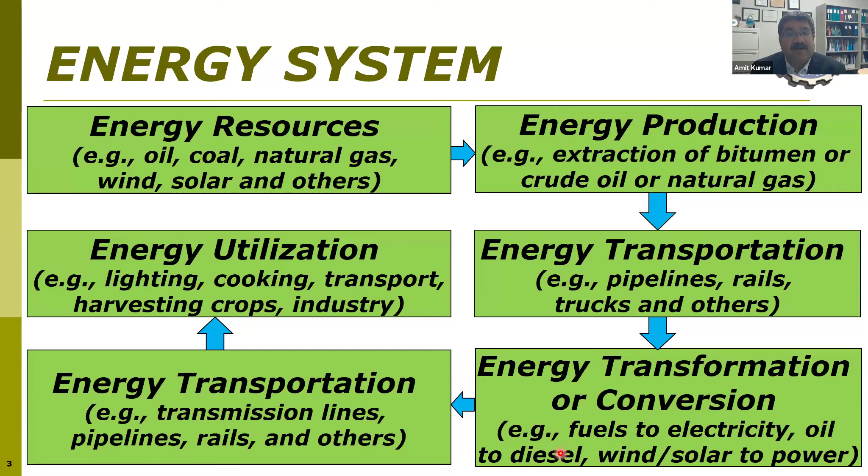If you look at the energy system, all the activities you do, starting all the way from production to utilization, are associated with impacts - greenhouse gas impact, a lot of focus on that, water impacts, land use impacts, and others, including, for example, biodiversity impact.

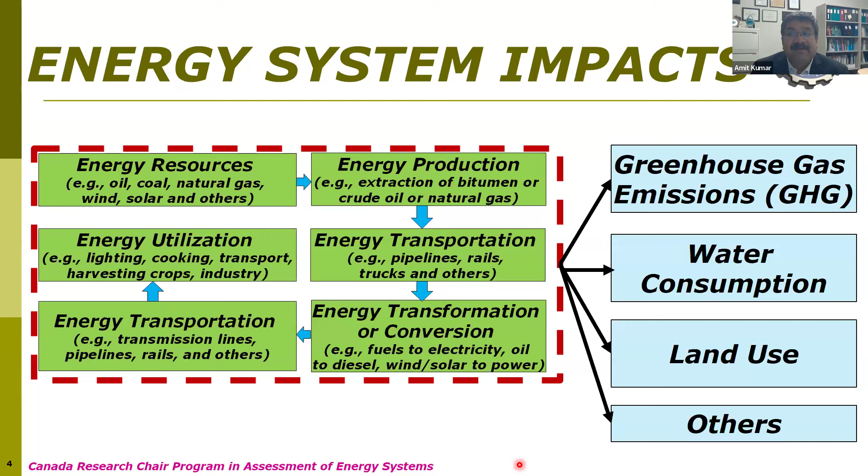Now, if you look at energy system change or energy system transition, what does this mean? It means basically moving from one type to another. So if we think about production, we look at fossil fuel-based energy being replaced by renewables or low carbon intensity energy - for example, coal by natural gas. So, from one energy source to another. On the consumption side, fossil fuel-based furnaces, for example natural gas furnaces, being replaced by electricity-based furnaces - again, a change from one source to another. In the transportation sector, electric vehicles are basically coming in and replacing some gasoline vehicles - again, change from one source to another. So that's the energy system change.

But this change is continuous. It's a journey rather than a destination. Energy transition has been happening since the beginning of civilization. We transitioned from non-commercial energy to commercial energy. For some parts of the world, it's the transition from one fossil fuel to another, much cleaner fossil fuel to renewable fuel. In some jurisdictions, it's even just going from no energy to energy. In 2022, there were 600 million people in the world who did not have access to electricity. So getting electricity is a transition from no energy source to an electricity source. It's a journey rather than a destination - that's the key message here.

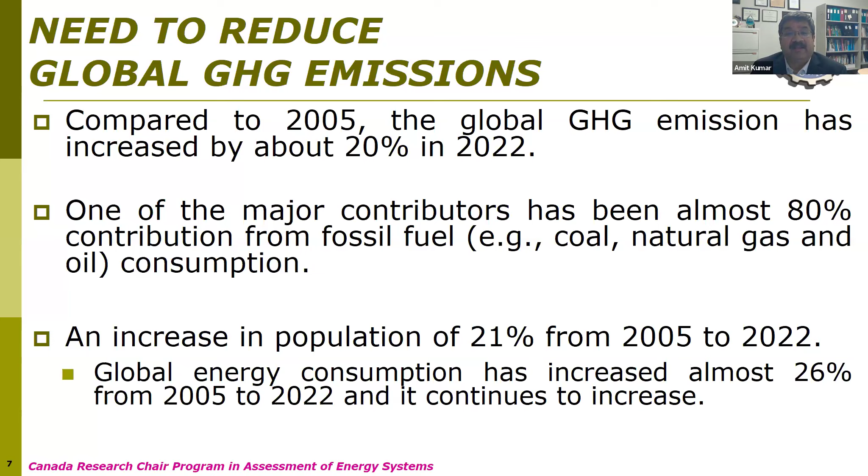We still use a significant portion of our energy from fossil fuels. If you look at the way we're going, our global energy consumption is increasing. Today we have about 8 billion people, and we expect by 2050 there will be somewhere between 9.8 and 10 billion people who will need energy, and on a larger scale. A lot of this will still be supported by fossil fuel sources, which will lead to GHG emissions. So the need to mitigate this drives a lot of these changes.

Energy independence is focused on the fact that energy is not available globally everywhere we use it - it's concentrated in certain jurisdictions. For example, fossil fuel is produced by only 21 countries out of more than 190 countries globally. It needs to be transported from one place to another, and there are challenges in terms of geopolitical issues whenever there is disruption in the supply chain.

If you look at some of these fossil fuel production places, 75% of coal is produced by only 4 countries in the world. Crude oil - only 6 countries provide 60% of that. Natural gas - only 6 countries provide almost 60% of global natural gas consumption. So there is transportation, and these are impacted a lot by geopolitical issues, which is why there's a focus on producing what we have within our own jurisdiction, where we have control.

Getting to energy independence is a drive for change from one energy source to another. This involves availability of renewable sources, what sources are available, and low carbon intensity fossil fuels which are available. For coastal countries, resources like wave and tidal power become potential sources when cost effective. In most cases, the drive is to get energy at lower cost, so we'll focus a lot on GHG mitigation and decarbonization pathways.

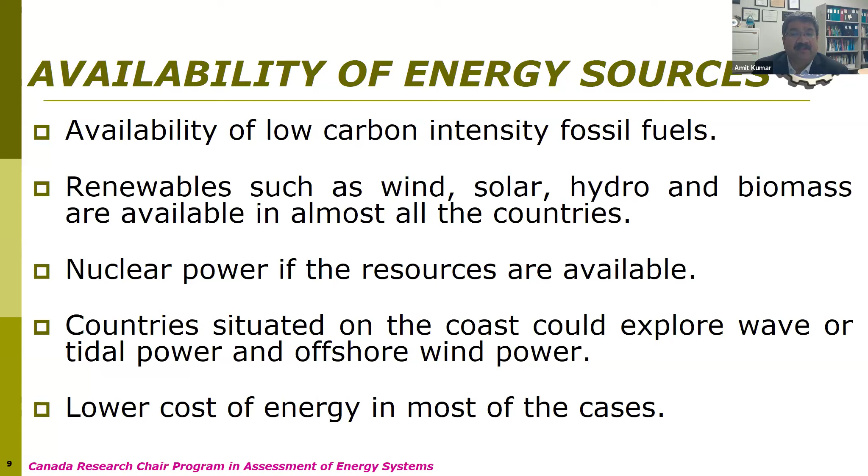In terms of GHG mitigation, when I think about the pathways for decarbonization and ways to mitigate greenhouse gases, I typically categorize all these options into three key baskets. The first basket is energy efficiency, where you improve the way you use energy. The second option is using more renewables like solar, wind, biomass, geothermal, in place of fossil fuels. The third piece is more focused on capturing what we emit.

For example, we use natural gas for producing power. You capture that CO2 which is emitted and put it underground or under the sea, sequestering that CO2. I also put hydrogen here, as there's a lot of interest in hydrogen. It could be placed into both baskets because you can produce it from renewable sources like wind and solar electricity, and use that in an electrolyzer to produce hydrogen and oxygen with water as a feedstock. We also produce a lot of hydrogen from natural gas today, but adding carbon capture and storage to this produces blue hydrogen, or low carbon intensity hydrogen. We'll come back to this.

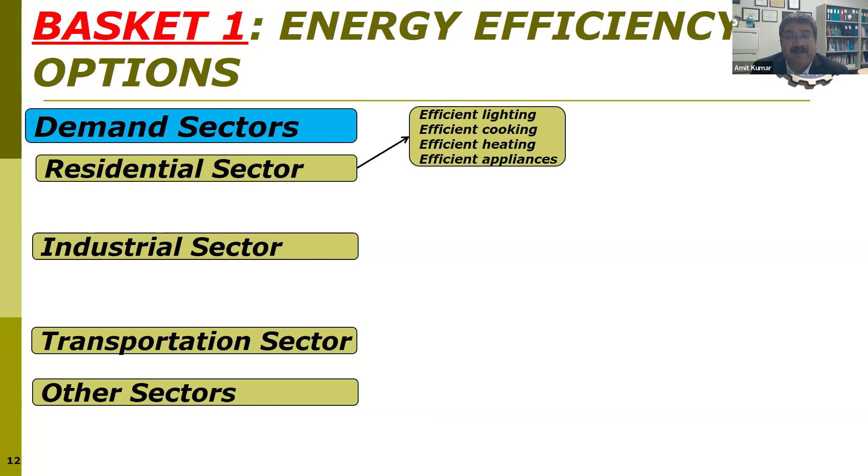If we look deeper into energy efficiency options, we have demand sectors - these sectors which consume energy. Our households, offices, industries all consume energy, and there are lots of options for improving energy efficiency. Under this basket, for the residential sector, there's efficient lighting, cooking, heating, appliances, and so on. For the industrial sector, this is just a snapshot of some key industries, but improving the efficiency of the equipment and the way we use energy reduces the amount needed, and thereby GHG mitigation.

The transportation sector, both freight and passenger, focuses in freight on efficient trucks, efficient trains or pipelines. Passenger transport focuses more on efficient cars. And then other sectors similarly focus on improving efficiency.

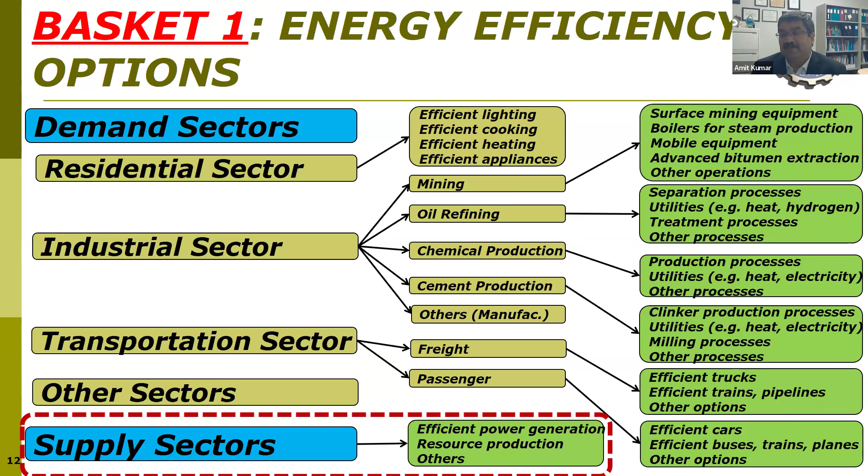That's the demand sector, but we also have energy efficiency options for the supply sector - efficient power generation from boilers, efficient turbines. These also provide lots of options. Most energy efficiency options are the low-hanging fruit - basically lower cost, so you can adopt these at lower cost per unit of CO2 mitigation. This is the first basket of options, and there are thousands of options to mitigate and use this.

The second one is renewable energy implementation, and I categorize these into two baskets. One is intermittent, which is not always available - wind, whenever it blows, we can generate power; whenever there is sun, we can generate solar energy; same for tidal, but these are intermittent. The other basket is base load renewables - hydropower, biomass energy, geothermal - these you can use all the time, these plants can run all the time, and these are base load renewables.

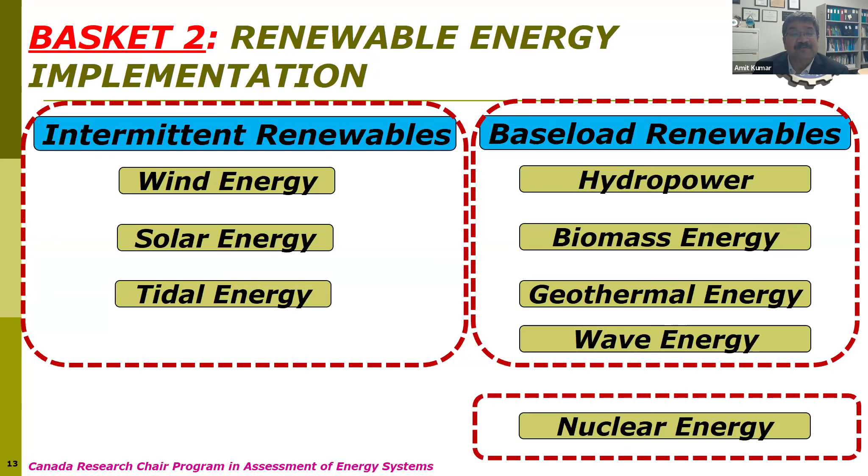I also put nuclear energy here, because there is a lot of interest in using nuclear energy as a decarbonization pathway, since you don't have GHG emissions when you use it. We have been using nuclear energy on a large scale, but there is a lot of talk now about small modular nuclear reactors - these are one-third the capacity of larger plants, about 300 megawatts. To give perspective, our West Edmonton Mall here uses 25 megawatts of electricity, so you can see how decentralized these small modular nuclear reactors are.

These are also smaller in size and footprint, but you can build the components and ship them, making them easier to assemble, which helps reduce construction cost. These modular reactors also have benefits in terms of how frequently you need to refuel them.

So typically, in a large nuclear power plant, you will refuel it in 1 to 2 years. These you can go to 3 to 7 years, and there is effort in looking at refueling this every 30 years. So you could see the impact of these. This technology is still developing, but this also is a key option for decarbonization.

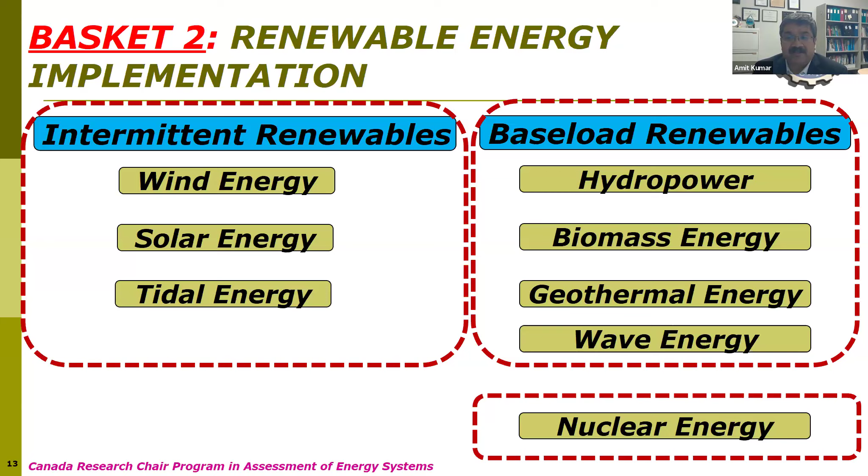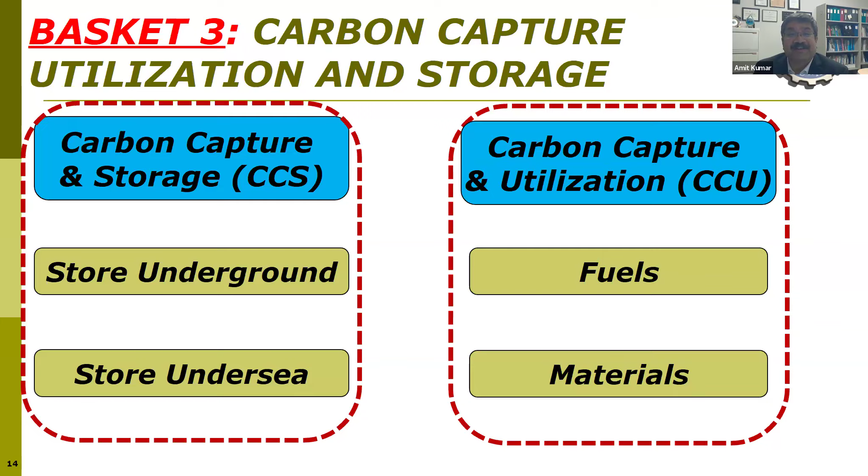We use a lot of hydrogen today, here and globally, but this is produced from natural gas. We produce hydrogen from natural gas, and in the process, there is emission of CO2. But currently, most of this CO2 goes into the atmosphere. And the process that we use is steam methane reforming. That's what we use for producing hydrogen. But this is gray hydrogen.

Another key basket is producing green hydrogen, which is from renewable sources. So we produce electricity from these renewable sources, use it in an electrolyzer, and produce hydrogen and oxygen with water as a feedstock. Most of these, almost all the renewables, can produce electricity and then produce hydrogen through an electrolyzer. Biomass could be used directly to produce hydrogen through gasification and pyrolysis. And here biomass I'm referring to, for example, waste residues, straw, forest residues.

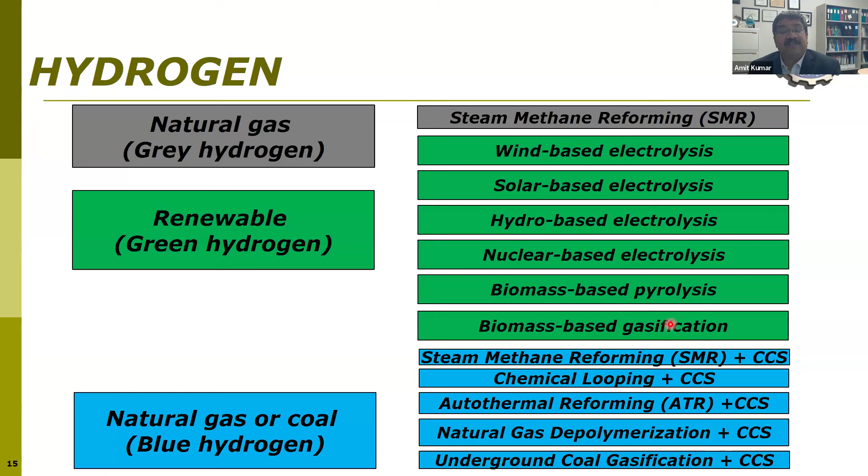And then all the natural gas-based hydrogen where we add carbon capture and storage, those are called blue hydrogen and low carbon intensity hydrogen. There are a number of different technologies for how we can produce this. The advantages of these range of technologies differ by the extent of GHG mitigation they produce, and the form of carbon produced. For example, with steam methane reforming, we can get up to 52 to 60% CO2 mitigation, and then the cost impact comes in. Autothermal reforming, which is a newer process, could get up to say 95% carbon capture and storage. And natural gas depolymerization produces CO2, but also produces carbon in solid form, which is easier to handle. So a number of these processes are there, but this is called blue hydrogen.

So to bring all this back, you have 3 baskets of options and thousands of decarbonization pathways, and the challenge comes in terms of how do we choose this? How do we make decisions on these decarbonization pathways? What gives us the best bang for the buck? And this is the question that we are trying to answer.

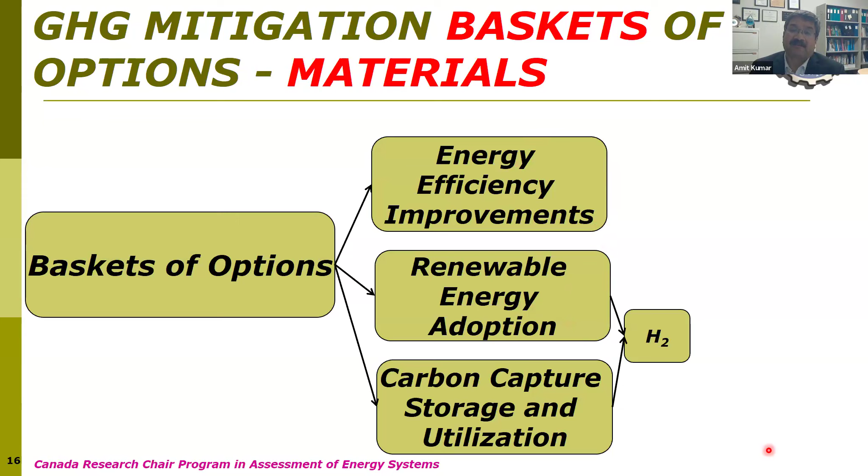And before we go there, I also want to point out that there is a significant move and effort in terms of producing sustainable materials, which will basically help in all these decarbonization pathways, but also help us in reducing our GHG footprint. So sustainable materials is a key piece of work too.

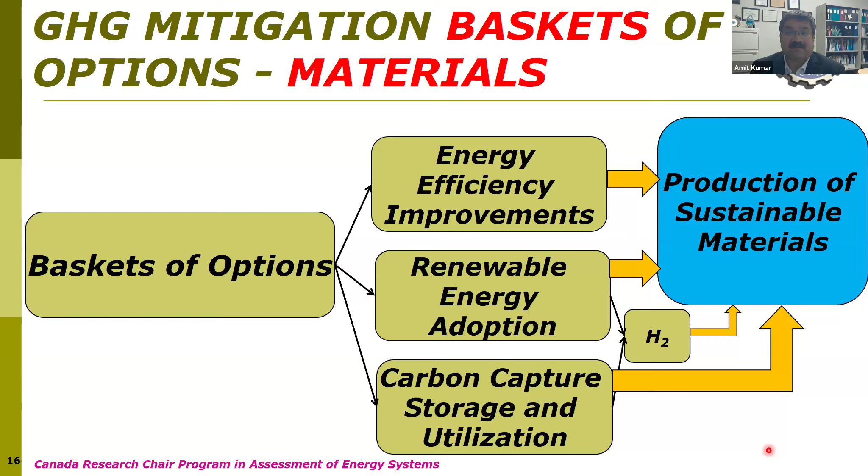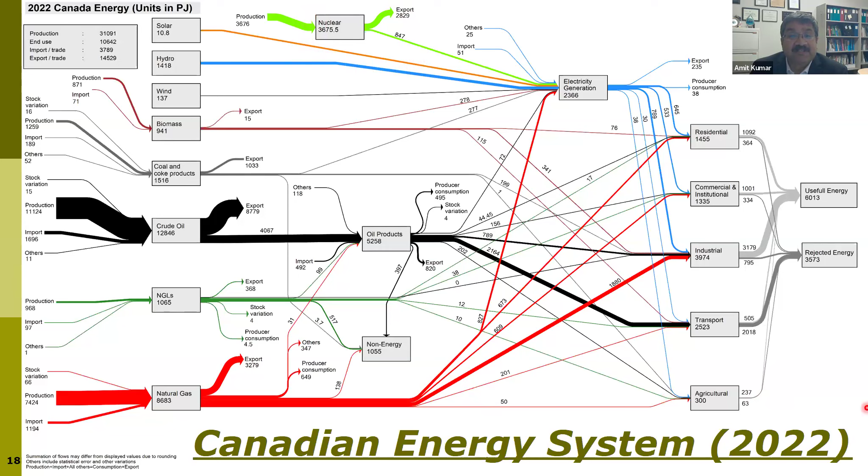Nuclear-based electricity is another key one. So this is the Canadian version, and you see a part of this is reflected in Alberta's Sankey diagram, crude oil, a lot of these, and predominantly this is mirrored in the Canadian form of the Sankey diagram. What you don't have here is a lot of nuclear, which is a potential option for us.

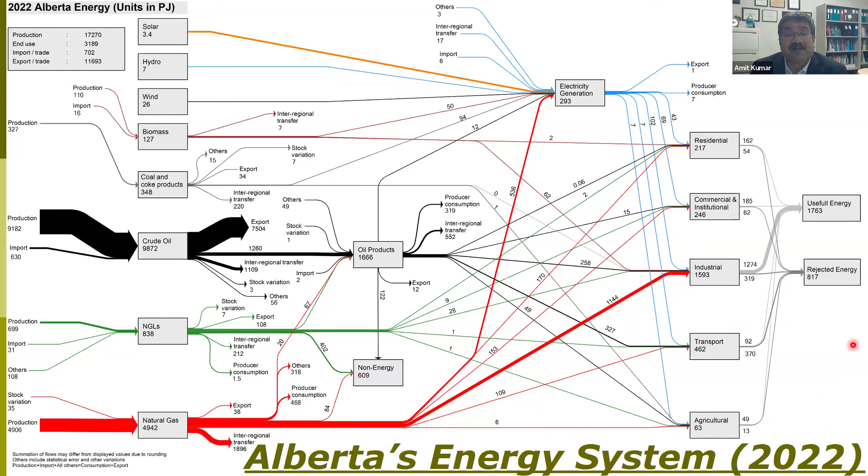Minor contribution of hydro, which is major in BC, Quebec, and Manitoba too. And then some of these, our major industrial sector, a lot of natural gas consumption in the oil sands sector. So from here, you look at these resources, these pathways for decarbonization, and then we need to find a way.

In terms of how do we address and assess these different decarbonization pathways to make decisions, this is where a lot of challenges come in. The very first one is the perspective we have and differences in energy exporter or energy importer needs. Jurisdictions which are net energy exporters, for them these fossil fuels or GHG intensive sources are bread and butter, the source of livelihood. So how do you transition? At what rate do you transition?

From an energy exporter perspective, versus energy importer, Alberta is an example, where a major contributor of GDP comes from the oil and gas sector. So the challenge is how do we transition, and at what rate, keeping in mind that it is a key source of bread and butter for us.

From an energy importer perspective, we look at Germany, a big manufacturing sector that imports energy. For them, the perspective is more on what form of energy do we import which can help us in decarbonization, whether LNG or hydrogen, a much cleaner source. Similar for Asia Pacific countries like Japan and Korea, net importers of energy, where the options for decarbonization are not widely available.

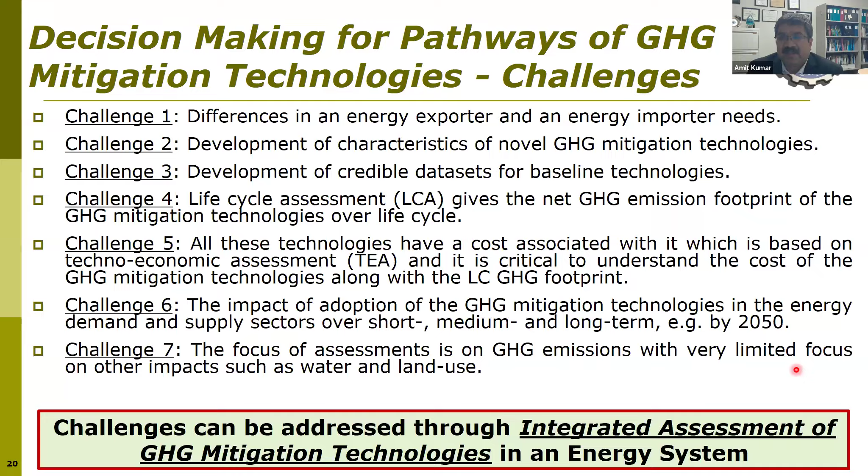For example, residential space heating, water heating, appliances, and so on - what form of energy do we use? So what we've been trying to do, and have been able to do, is develop these data-intensive models where we go into details of each and every piece of equipment and try to understand the energy intensity and emission intensity.

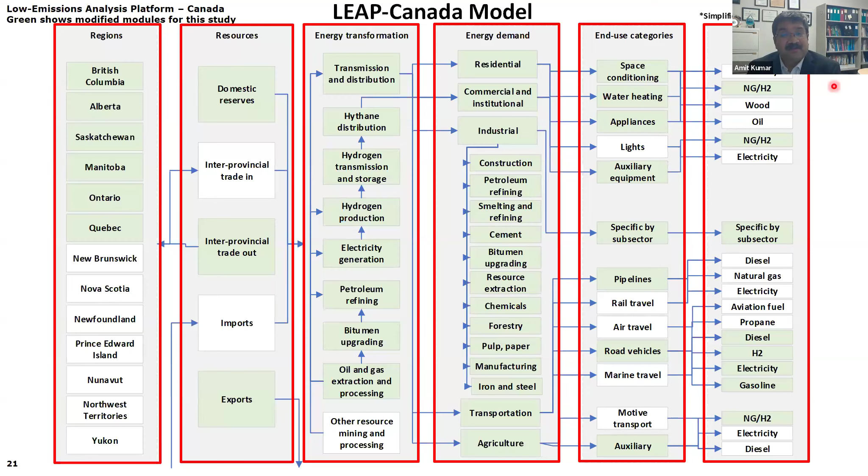This helps us develop thousands of scenarios in terms of replacing a technology - what is the impact on the whole energy system? So you're not doing it in isolation. This whole energy sectorial model is supported by a lot of work outside of these LEAP-Canada-based models, where we try to separately understand each of these technologies through development of detailed process models, estimating cost, developing techno-economic models, technology penetration models, using machine learning techniques to support scenario development.

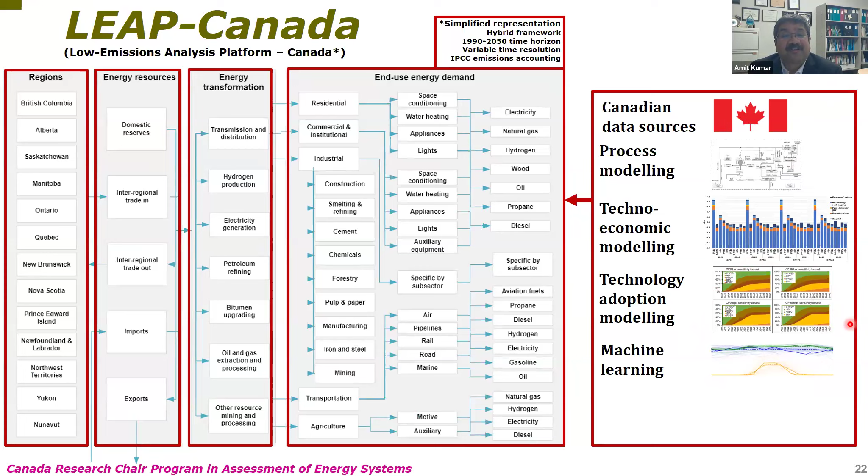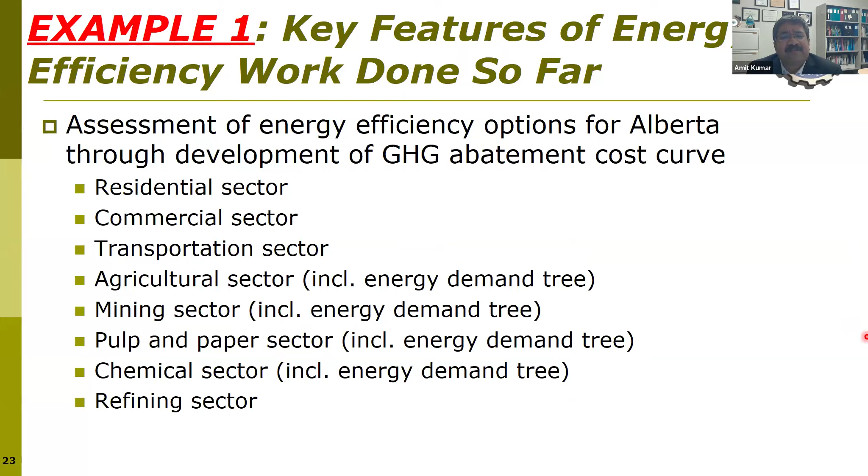I'll give a couple of examples which we have done, and there are numerous of these. We looked at the potential for energy efficiency - how much can it mitigate? Some of our estimates suggest about 24 million tons that you can mitigate through improvement in energy efficiency in Canada. This shows everything brought to the same page.

Each of these colors that you see represents different sectors, and each color and sector is a thesis in my team - so you have students working on these thousands of different options. The width of each of these bars shows the extent of mitigation possible by implementing a particular technology, and the y-axis shows the dollar per ton of CO2, showing the cost effectiveness of these technologies.

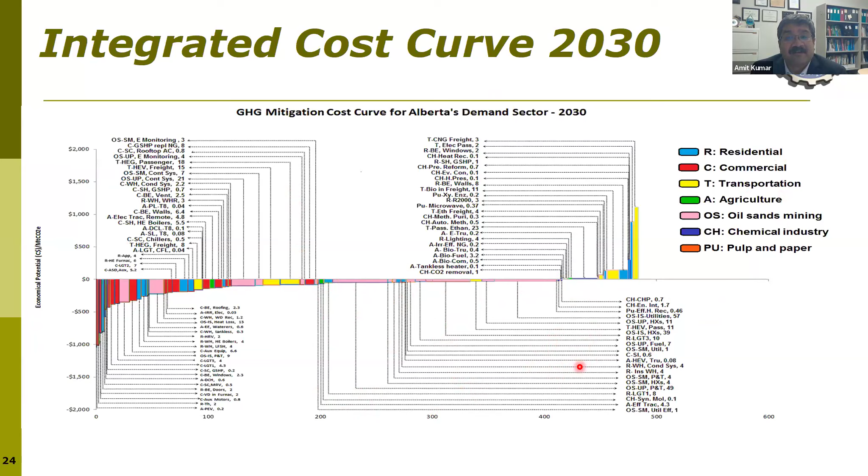So everything below the horizontal line is very attractive - a lot of energy efficiency options are low-hanging fruit. The other example I'm going to give quickly is the hydrogen opportunity.

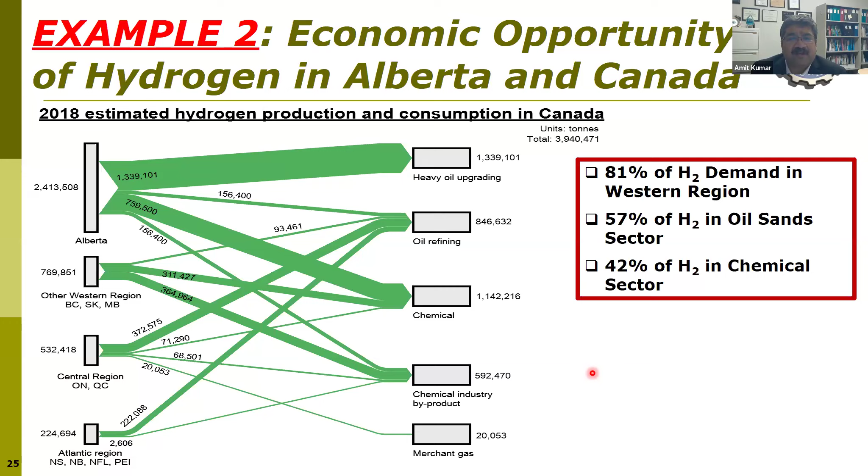We do have a lot of hydrogen production already going on in Canada. We produce about 4 million tons of hydrogen. Most of this today we use in the Western region for oil sands upgrading and then for producing chemicals. But this provides a lot of opportunity in terms of having a lot of resources to produce hydrogen, having the experience of producing it on a large scale.

We currently have large-scale plants producing 350,000 tons of hydrogen each year, which is a very large-scale plant. We do have capacity to produce this with a low carbon footprint because of our carbon capture and storage infrastructure in Alberta, and a trained workforce who have been handling and producing hydrogen. So there are a lot of different ingredients which come in and provide economic opportunity.

We have been using hydrogen, but a lot of focus now is on using this in different sectors. Wherever you use natural gas for producing heat, you can use hydrogen there. In our residential homes we could have hydrogen furnaces, in offices, in industries where you use heating applications using natural gas, you could use hydrogen. It could also be used in high temperature applications, the transportation sector, heavy duty trucks, and power generation.

But then another big opportunity is in terms of exporting it to jurisdictions that don't have a lot of options for decarbonization - Asia Pacific countries, for one example.

The other aspect of our modeling has been looking at the water impact of these decarbonization pathways. We have been developing these data-intensive models, which help us assess the impact of a decarbonization pathway in terms of water - how much water would be needed, and what is the water footprint of a particular decarbonization pathway. So that's a snapshot of the type of work that we do in terms of integrated assessment.